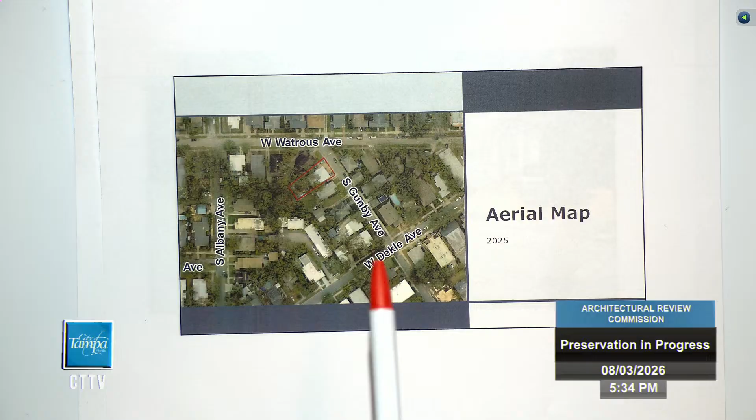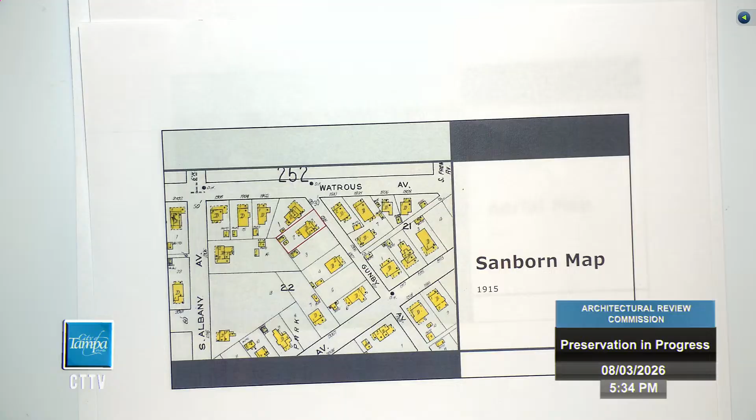So just to give you a sense of place, it's one parcel in from the corner of Watrous. It's on Cunby. There is an alley that runs behind it. Here shows the property in question. If you zoom in, you see that what's hatched in the front of the structure itself indicates that it was an open porch. So the open porch ran the whole distance of the front facade.

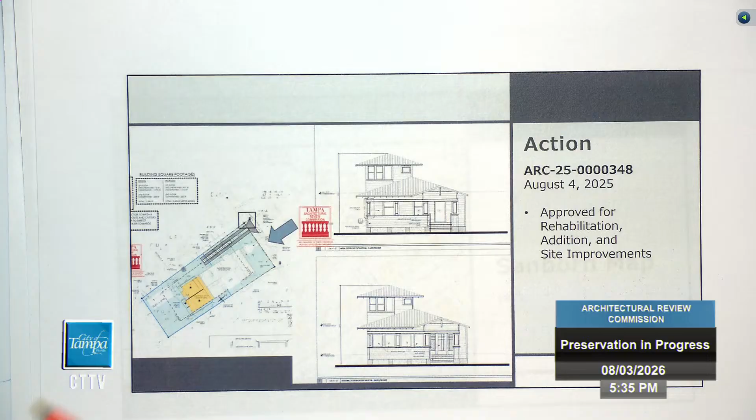These were the drawings that came forward in 2025, showing the reestablishment of a drive aisle that's more consistent with the historic fabric, opening up the front porch, and they displaced some of the square footage that they lost to the rear. So the yellow shows a one-story addition to the rear. This drawing here shows that the porch was enclosed, and now you see the knee wall that's here on the porch. A lot of times when they enclose the porch, the fenestration stays behind it. So these windows were there, we know where the openings were, and that was part of the renovation.

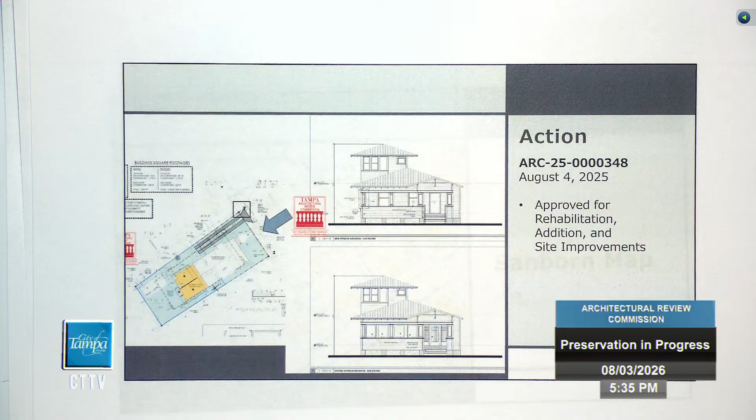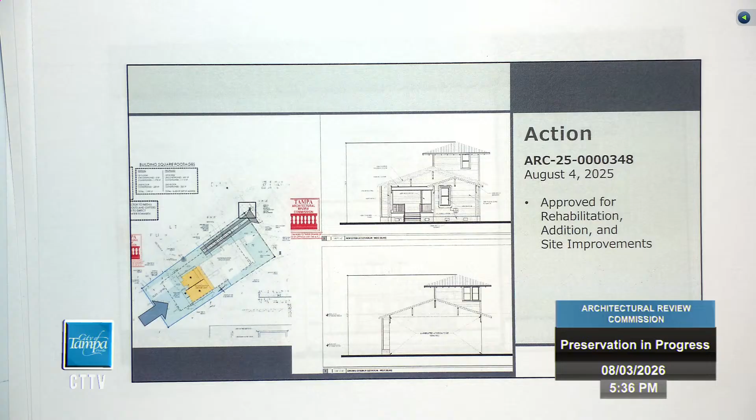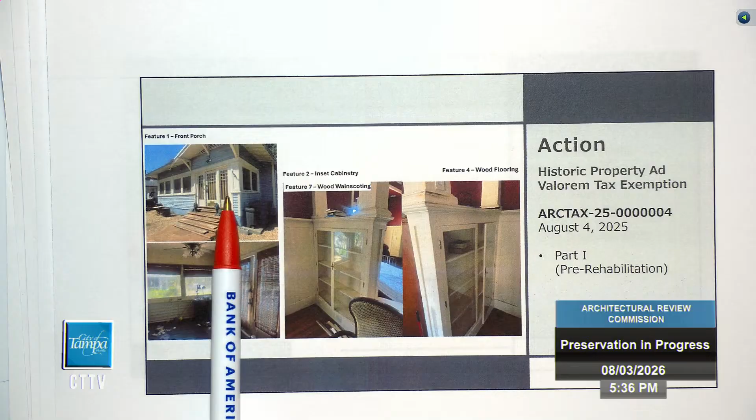Just going back to the front porch, you see how the porch was enclosed and everything was brought to the front facade. And you saw through the drawings that the doors were recessed back to where they're originally set at, and the windows were removed. As I stated, some of the interior features, they have these built-ins here with the columns that will be retained. They have the original single-hung windows that they will evaluate and see if they could be incorporated into the project. If not, they will have period-appropriate windows.

Good evening, Dana Crosby Collier, Legal Office. Wondering if anyone has a conflict of interest with any item on the agenda this evening? I do not. No? Has any member had any ex parte communication regarding any item on the agenda this evening? I have not. Thank you. So at this time, we'll do the swearing. Everybody that wishes to testify, please stand up and raise your right hand. Do you solemnly swear or affirm that the testimony being provided today is the truth, the whole truth, and nothing but the truth? I do. Yes.

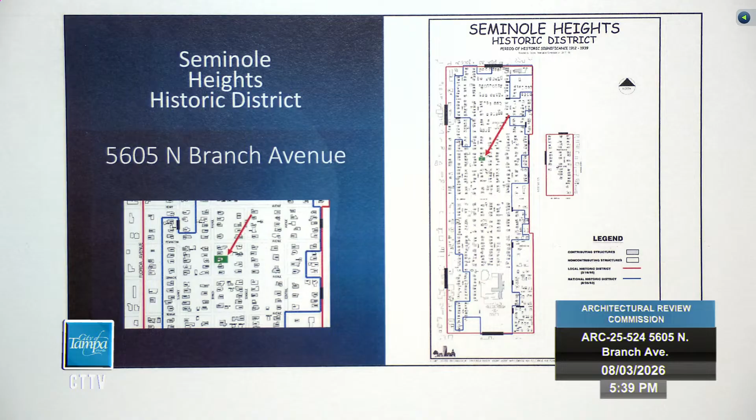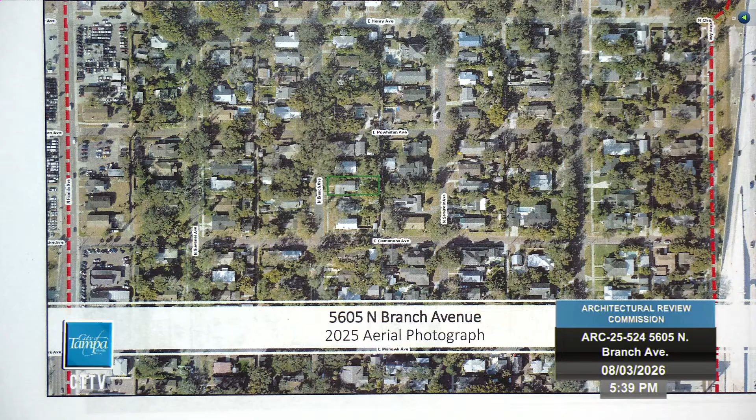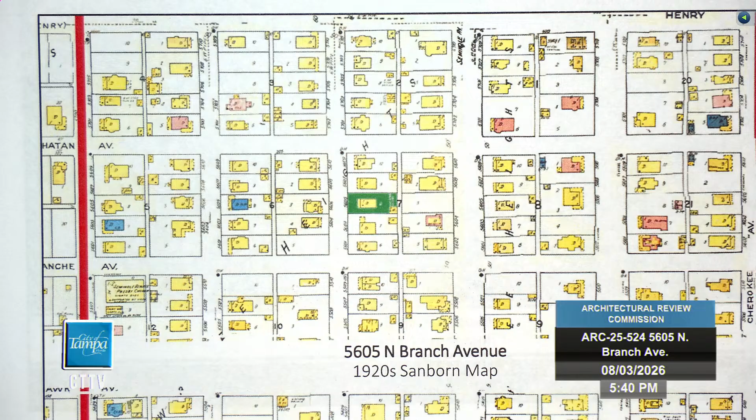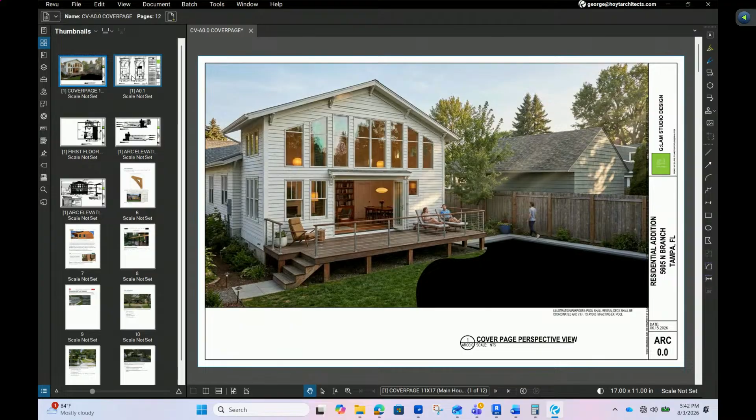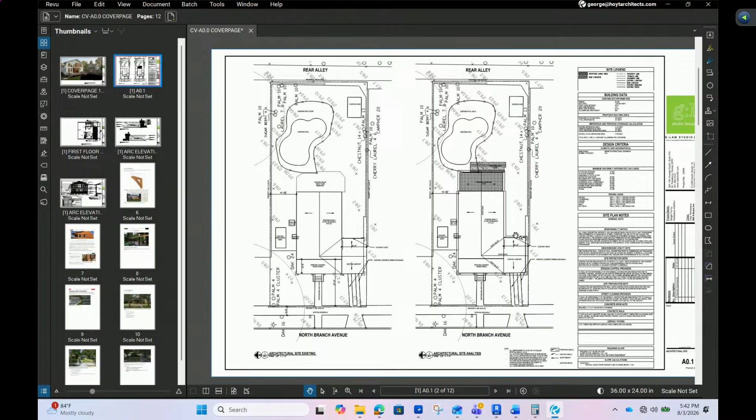The site plan showed basically on the left side the existing condition, which has an existing deck. The design intent is really to just build over that, remove the existing deck and promote the new addition on that same area. Ran all the calculations just to make sure we didn't have any impacts on the impervious or pervious ratios. So on the right side is the new addition with an extended proposed deck, which is complementary to the structure.

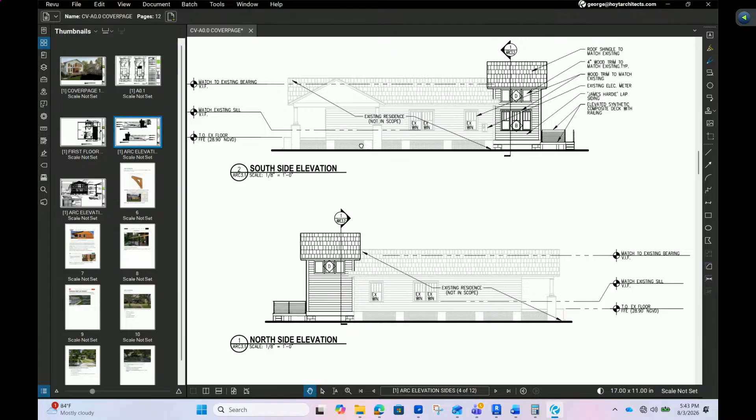Going to skip over to just the elevations so you can see the side elevations to the house. I do apologize for the grammar there. So this is looking from the carport onto the side of the residence, the existing residence. So you can see that the intent was to try to complement the existing main residence, but also introduce a little bit more distinct character with the windows and also the trim along the new addition of the structure.

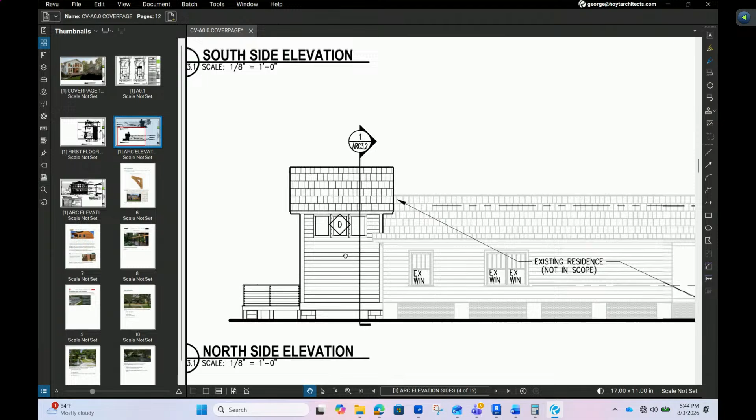Plan is to keep the same kind of materiality with the roof shingles and lap siding, and then do stucco piers around the existing structure, and then promote the exterior deck on the rear. On the other side, on the north side of the building, actually, you can see again it's just showing the mirror of the three windows at the top of the new addition. There are no new windows here, as there's a proposed bathroom in this area, and the rest of it is just complementary to the existing structure.

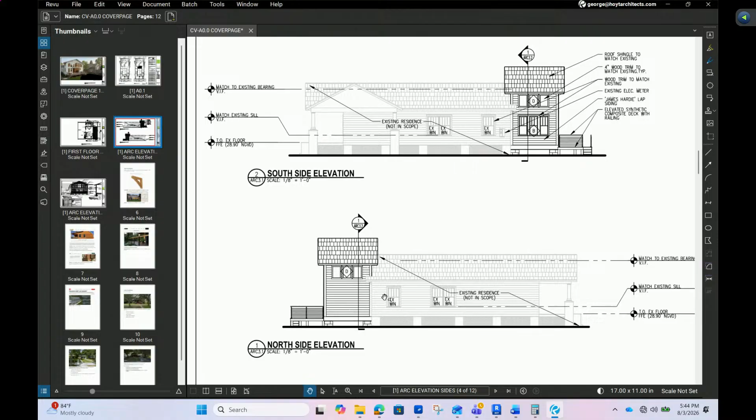And then the brackets, which will be the same brackets as on the main existing residence. We're still doing the exposed rafter tails, same kind of pier systems. The lap siding, we can promote a different, I guess from a 4-inch to 6-inch profile kind of look, just to distinguish the new and the old. And then the trim bands, which is a distinct characteristic of the new versus the existing house, which does not have any.

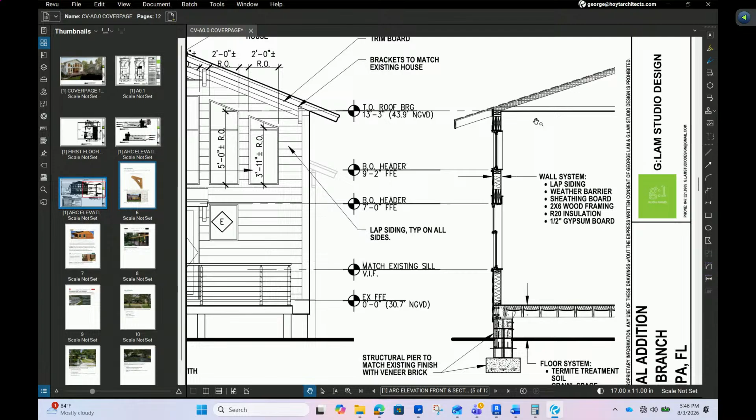On the side here's just a cross-section of what this would look like. The intention is to recess the windows in, similar to the main residence, also to use a wood-appropriate window type, and it will sit on top of these piers. They will be stuccoed, and then the raised platform. And it is a 1.5-story volume space, so I know it's a little bit of a different character from the rest of the neighborhood, but wanted just to show and indicate that.

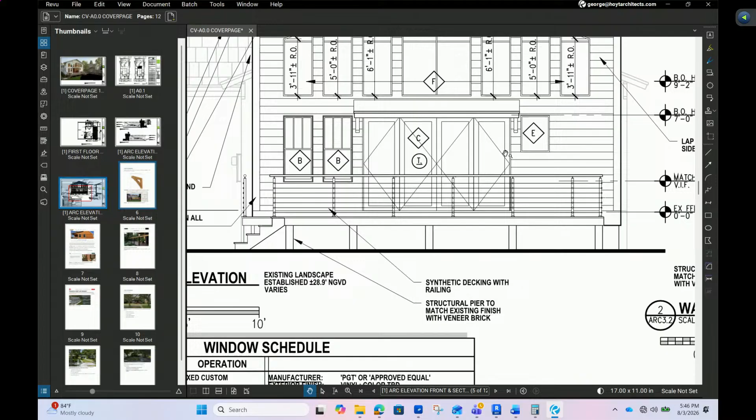And then we're also promoting these, I guess you could say it's almost similar to a NanaWall or Nana doors, bifolding doors that would open similar to this, kind of that look and feel to get that openness to the outside.

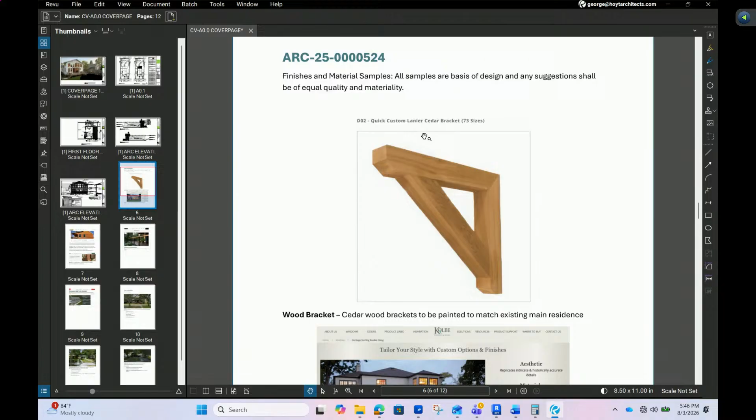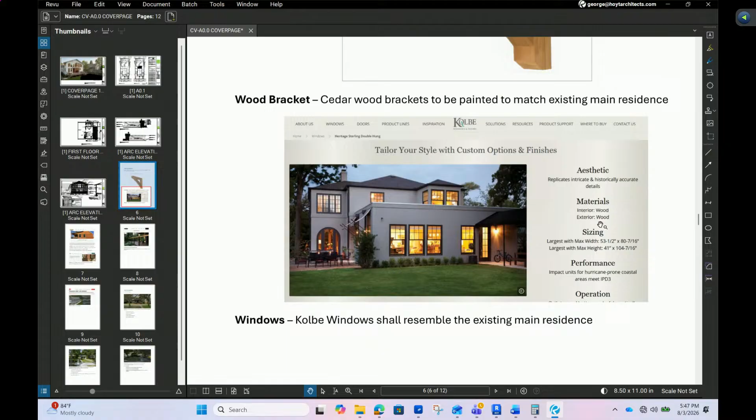Next here are just a few of the materialities. Like I said, we're reintroducing similar materials for the finishes on the brackets. These would be painted. I just wanted to indicate that they would be wood to be similar to the existing residence. The windows, we're promoting to use a wood window. I know it's a little bit of a challenge with the new aesthetic windows, but we feel like this particular manufacturer can provide some of these capabilities with the window types. And they've come a long way now with code, so impact rated is now an option as well.

The lap siding is going to be very similar to what's on the existing house. This will be painted, but I wanted to indicate that it would be wood, not a synthetic or cementitious application, just to complement and preserve the historic guidelines. The deck, what we're trying to promote is something similar to a wood look. It's horizontal, not vertical, so you wouldn't see much of it. But we would like to explore the option of a Trex deck that has the grain and look and feel of a wood material finish.

And then the railings and the guardrail, again, similar to the context, we're trying to promote something that has a little bit more longevity than just standard wood, gives a little bit more of a contemporary, modern take to the rear facade, and it's just trying to capture a moment of time between the old and the new of the structure.

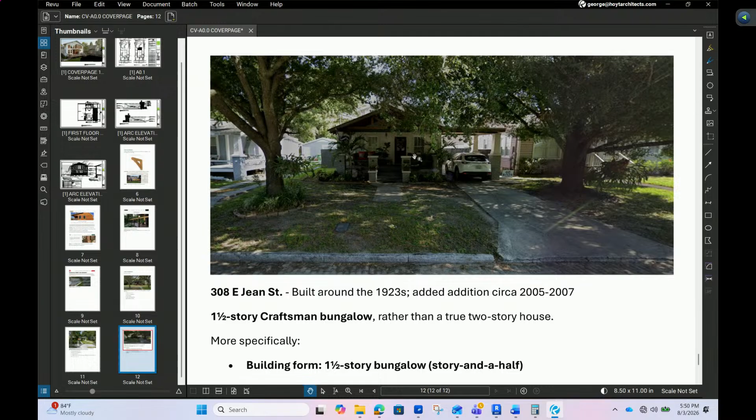Good evening, Ron Vila, staff with Historic Preservation. Staff's finding is that this project is consistent with the Seminole Heights Design Guidelines and the Secretary of Interior Standards for Rehabilitation. In reviewing this project, it had some items that were controversial at the time. We worked together to assist him to bring it more into compliance, so that we feel it is consistent.

When you look at the Secretary of Interior Standards, there are some bullet items that when you do an addition, it should be on a secondary or non-character defining elevation, that the addition results in the least possible loss of historic fabric, and that there's a distinction between the old and the new. So as you go down the side, I think that it plays well together, and then when it goes to the rear, there are some discussion points that I'm sure are going to be elaborated on this evening.

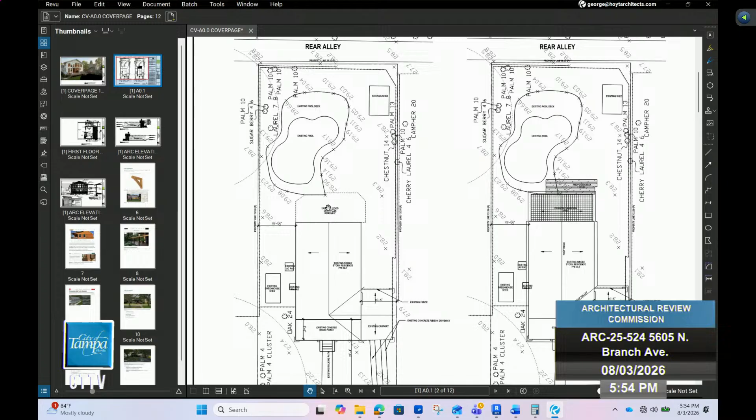Can you go to your site plan, please? If you'll zoom in to your proposed site plan over where your mechanicals are, is there a fence to the front of that area? Is that a privacy fence that's shown right there? Yes. Okay, all right. Can you show me the rear elevation?

So your trim on your windows that you have proposed here is different than what you have proposed on the side. Is that correct? Yes. Is there a reason that we can't have them all the same on the addition? No objection to adding those. Okay, and staff has suggested maybe doing a 1/1 on all the windows on the addition. Are you opposed to that either?

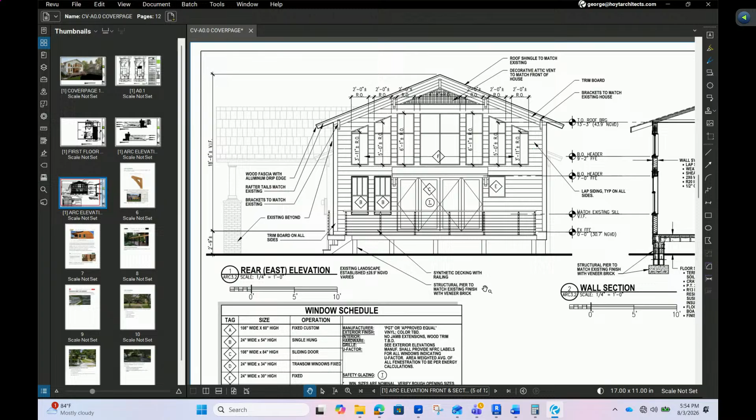Nope. Okay, all right. The roofing material on your shed roof that's over your NanaWall there, do we have material that's going to be there? It would be the same. It would be shingles? The shingles. Okay, yeah, so we just need to call that out, okay?

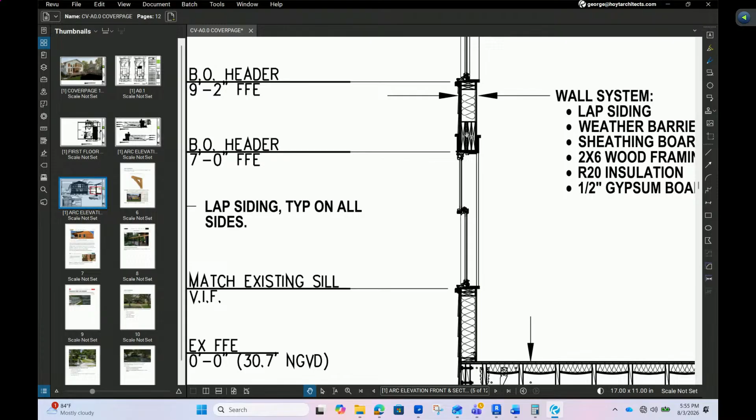On your wall detail, it appears that your windows are flush to the exterior. Is that the way it's shown? No, it should be corrected. It will sit, so it'd be basically recessed in. Okay, so that wall section needs to be corrected? Yeah, it should match more like the upper, which is more recessed in, yeah. Okay, all right.

Your material palette, you're showing rough sawn cedar pre-finished siding, and you're saying that you're gonna have it painted, and you were just trying to represent that it was wood. What type of wood is it gonna be, smooth sanded? Is it gonna be a pine? It would be preferred to go to a pine, because the existing house is on pine. It would be sanded, treated, and then painted. Okay.

All right. Your deck, you're saying you wanna use a Trex style deck. Are you opposed to going with wood on that rear area? I would have to ask the client. Client? Okay. But you'd be open to discussing it? I mean, I would prefer the synthetic material, but if I cannot do it, then I guess I can't.

Okay. Can you go back to your front elevation? I'm sorry. Go back to the front elevation so I can see. No, that's the rear. I don't have a front one here. So we don't know what the addition's gonna look like from the front of the house. Is that correct? Yeah, I don't have one, sorry. Okay.

And then staff has made a note that it appears on your image that you have here that your exposed rafters aren't exposed since you have a fascia. Is it your intent to have exposed rafters with no fascia? Yes, that would be the intent. So then there won't be a gutter? No, there won't be a gutter there. Okay. And last, well, maybe not last,

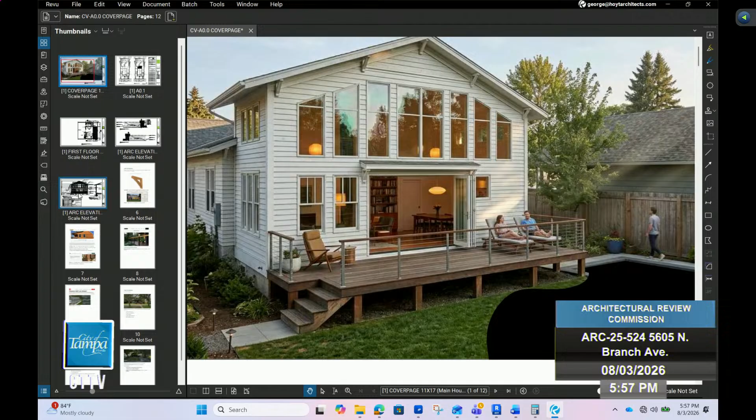So are you gonna have columns or is it gonna be a solid stem wall? No, it would be columns. Okay, so what's gonna be between the columns? Is there gonna be anything between the columns? No, like the current house doesn't have anything, so it's all open. Okay. All right. Okay, thank you.

This is last. Hardware and lighting on the exterior. Do you have any lighting on the back of the house, on the exterior? Any hardware, door hardware, anything like that? Door hardware, no. That's gonna be part of the NanaWall, I assume? Yeah, and it would just be whatever the manufacturer provides, yeah. Do you have any lighting on the back of the house?

It would be under the soffit here, under the little awning. So it'd just be some lights. Recessed lighting? Yeah. Okay. I can't think of anything else right now. Commissioner Brogan?

You don't need, code-wise, the railing on the edge of the deck, correct? I'm sorry, for code? Yeah. I believe I do just because of the height. What's the height above grade? This is about 2 feet. Okay, you don't need it at 2 feet. The code is 30 inches. 30 inches, okay. Yeah.

Are you married to the aircraft cable and steel and modern railing? And I'm not opposed to it, I'm just asking you, are you married to it? It would be rods, they wouldn't be air cables. That would be the design intent, yeah. But I guess I would ask the client if he's opposed or not. Okay. I'm okay with no railing. Okay, no railing at all. Okay. Yeah.

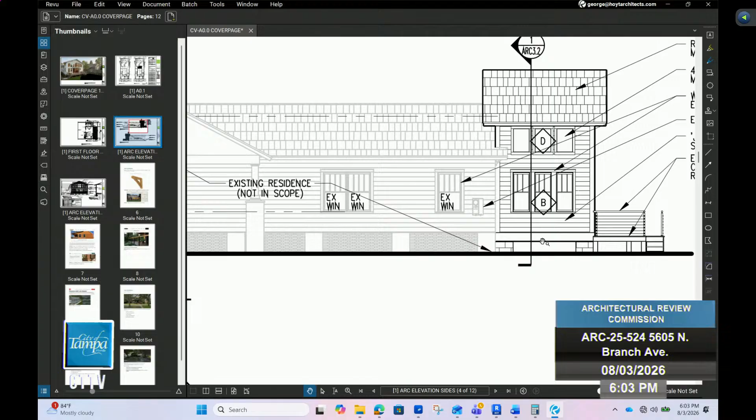Okay. So there is a lattice screen in between. So is there a reason you're not going to do a lattice screen? You're not proposing to do one on this addition? No, at first it was just assumed to not put anything in there, but I don't mind putting in a lattice to complement the rest of the house. It was partly because this was treated as a new addition, so it's just to give a little bit different character, that's all. And because we had this deck that's open as well. Yeah.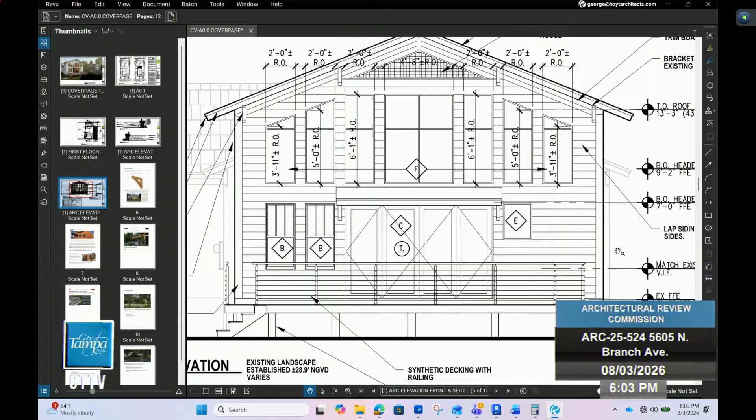So go back to that rear elevation again. I think you're showing it, but there's a couple of things that don't match up with the rendering. So the walls on the north and the south are set in from the walls of the existing residence. Is that correct? Yes. In the back, the faint line is the existing and the proposed is the darker bold line showing the offset on both sides. Okay. Yeah, there's a lot going on in that back elevation. It's throwing me off a little bit.

Okay, so I have a question for Ron. Ron, the synthetic material on the deck has come up before. In the back, the board has reviewed and approved certain situations, but as a replacement for wood, there's ipe out there that weathers very well, and there's KDAT, kiln dried after treatment. Both of those have been successful in the field, so if you want to stay with a natural material, there are options out there. Okay, thank you.

For the applicant or the owner, would you be open to either one of those options as opposed to the synthetic material? So is it wood and just treated differently? Ipe is a wood, it's just a very dense wood. And the other one's wood too, it's just kiln dried, so it's dense and it just doesn't rot as easily. Oh, okay.

This question comes up quite often. On front porches, there is no flexibility. It has to be wood on the historic homes. So we have these products that we've witnessed over time, 5-10 years, that if you take care of them, treat them, do maintenance to them, they will have some longevity, so I just wanted to throw that out there.

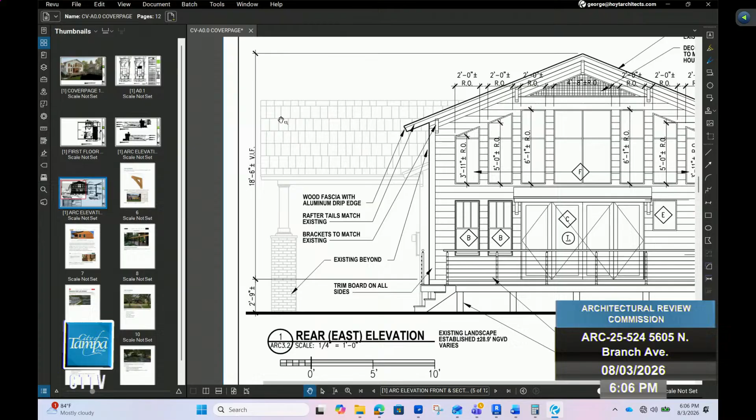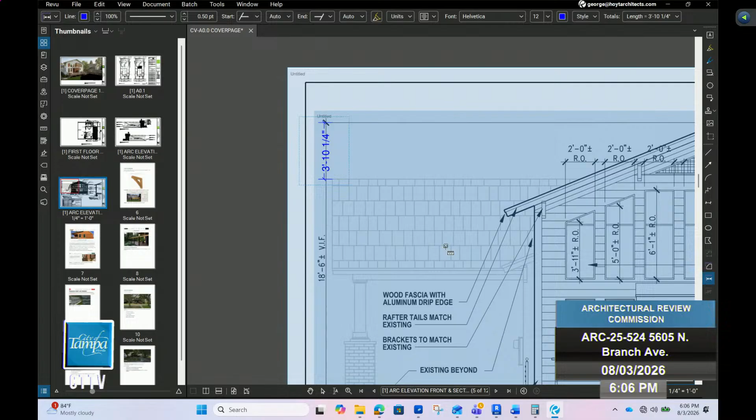So the peak of the existing, let's see, so the proposed is what, 18.6? It's gonna be 18.6 is the proposed. Okay, and let me see, I can do a quick... It's almost 4 feet of a difference. Okay. Okay, those are the questions I have. Does anybody else have any other questions? Okay. All right, you have 5 minutes for rebuttal if you so choose. Nope, not this time.

Okay. All right, at this point, we're going to close the public portion of the hearing and we will move on to discussions. The floor is open. I think he needs to do some more homework. His plans aren't mentioned, his elevations, he doesn't have some materials called out. I would have no problem him working with staff on finalizing the small details, but I don't feel comfortable right now that he has conflicts inside of his drawings. If we approved them, what are we approving? The elevations or the plans? The material call out or the plan call out? It just seems to be conflicting each other.

I understand the conceptual nature of what he's presented to us, you know. Yes, is he missing a few things that are required? Yeah. I don't have a problem with the design. I don't have a problem with the design of the windows. I think it's a rear-facing rear addition that is, you know, not as onerous as it looks, like you're saying, confusing with the big glass and all that.

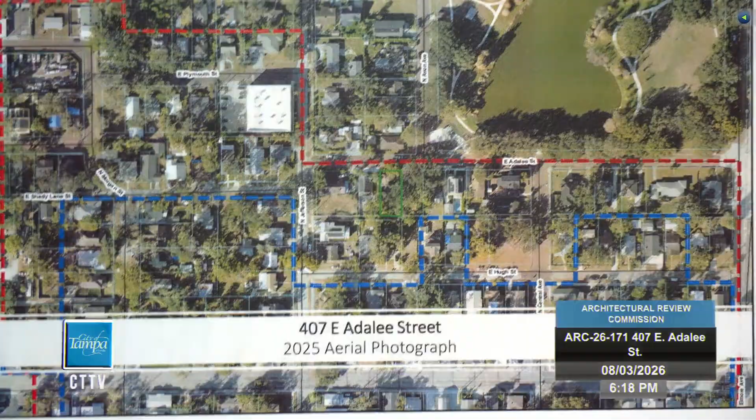This is looking from above. See the property here? It's by the lake that's in Tampa Heights. This is looking at the vacant parcel. You saw this a couple months ago. The tree in question in there is no longer a question.

They worked it out. They hired a professional arborist in communication with the city's arborist. The tree is no longer an issue. The tree is going to be removed, so it's not in the way of the structure. This is looking at the fabric around. This is new construction. That's on Adalee as well.

This is a period structure on Adalee that abuts the property to the west. Directly across the street, you have a non-contributing structure. Some street shots. This is a brick-lined street. Have the interstate in the background over there, and then once again you have the little lake that's in Tampa Heights. Moving in the other direction, the historic bricks with the granite curbing.

And just to conclude with the alley, it is an open alley. It has not been vacated, but it's unimproved. They're choosing to do all their vehicular access off the primary street. I will have the agent address the board.

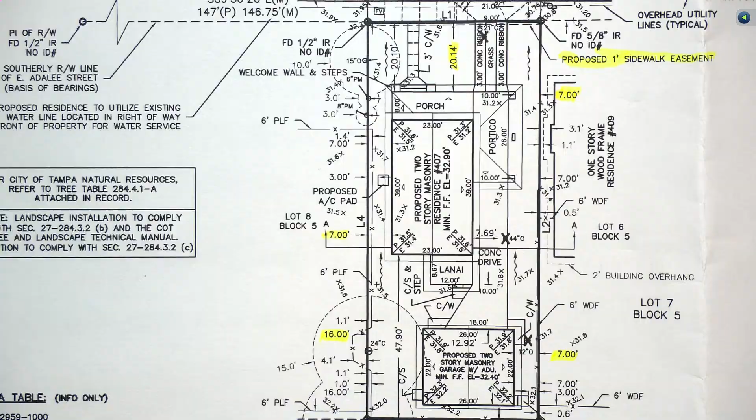So this lot is approximately 49 by 115. We're applying for a new construction, single-family residential home with approximately 1,750 square feet in it, along with an ADU in the back under the Tampa Heights guidelines for ADUs.

The front setback aligns with the two contributing structures to the left and the right with a 20-foot front setback, and the granite curb is to remain. It is to be lowered at the driveway, and we will be deeding over a 1-foot sidewalk easement as transportation desires a 6-foot sidewalk. There's only 5 feet between the granite curb and the property line. The sidewalk will abut the granite curb and extend 1 foot into the sidewalk easement.

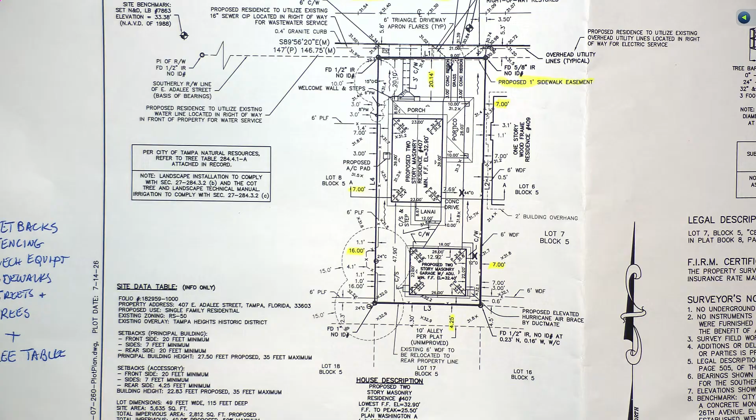The side setback at the porte cochere to the east is 7 feet. The main house side setback is 17 feet on the western side, and the ADU is a 7-foot side setback on the easterly side. There are 4.25 feet at the rear, abutting the alley, and 16 feet of side setback on the westerly side. The granite curb is to remain restored and in place, and I'm sorry, and then you've got mechanical equipment on the westerly side.

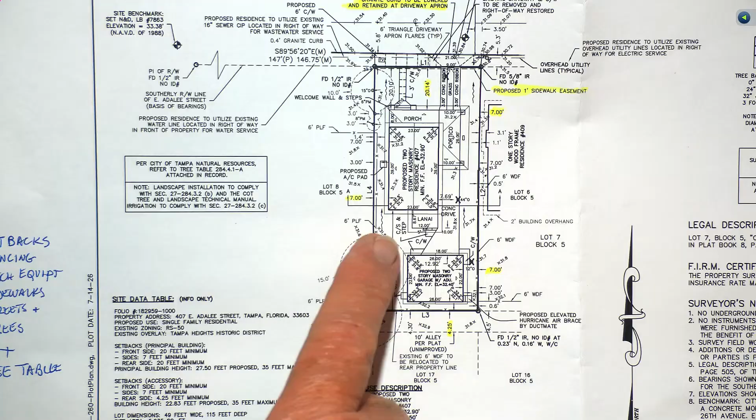There is some existing wood fence that belongs to the easterly neighbor that runs along the easterly side, and there is a 6-foot white vinyl fence on the westerly side that belongs to the neighbor to the west. Neither one of those vinyl fences extends past the front porch of the proposed structure.

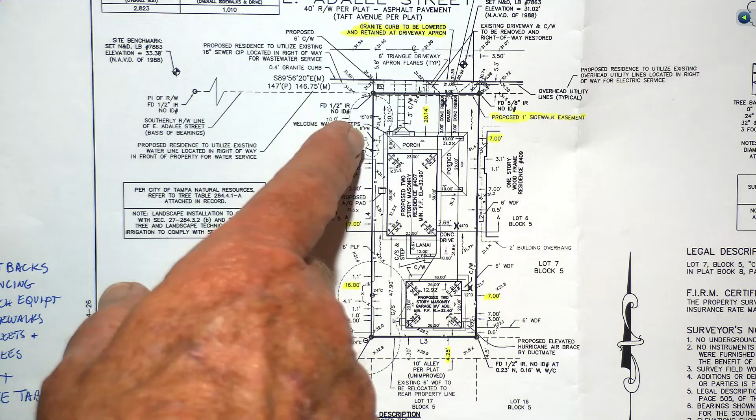The sidewalks per the guidelines for Tampa Heights are scored at every 3 feet, along with the lead walk entering up towards the welcome walls, flaring at the welcome walls up onto the front porch of the house. There is one tree to remain. There is a 10-inch live oak at the front property corner that is a shared tree, along with 2 cocos plumosa palms along the westerly edge, and as Ron mentioned, the oak at the rear of the porte cochere has now been granted a variance for removal.

There is a 12-inch oak in the westerly corner between the garage apartment and the property line, and we have created a tree matrix mitigating those trees, and I have a copy of the tree matrix which has been entered into the Accela record. That was formulated with myself and Natural Resources, City of Tampa.

This is a photographic copy, basically, of what the house will look like. This is an actual model that's been built previously in Tampa Heights.

And I will begin with the elevations. I'm going to present a rendering just for your benefit, prior to. Does that show up there? Let's see, there we go. Oops, sorry. That is actually just a rendering, and then I will present the elevation that it actually comes from. And this is the front elevation facing north.

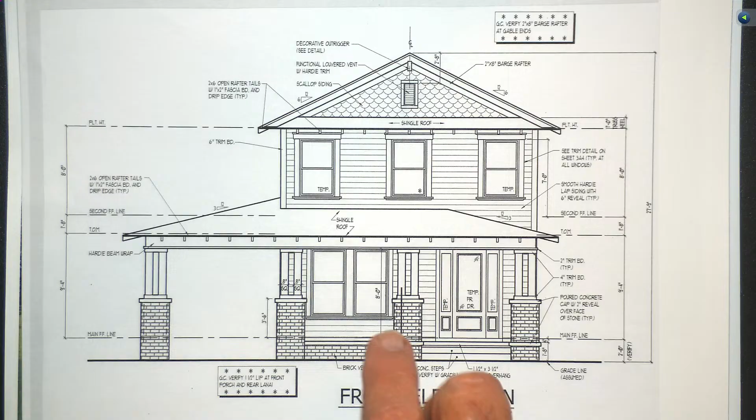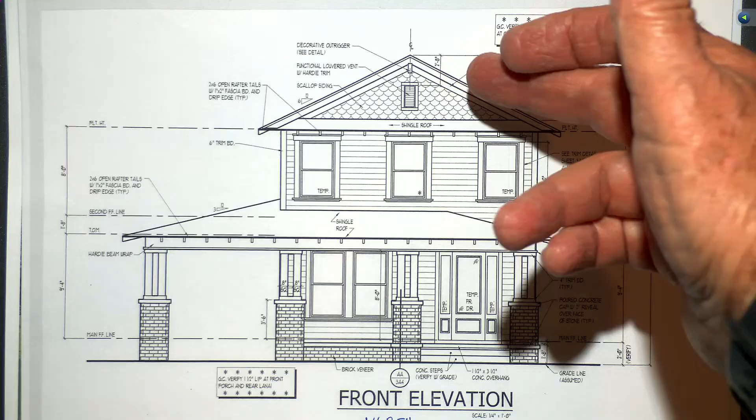Get it all in there for you. So, very typical design, open rafter tails, windows that are essentially marked in some sort of repeating pattern. It has a period correct front door with 2 side lights, along with a smooth finish 6-inch Hardie lap siding throughout both the upper floor and lower floor, upstairs and downstairs, along with a fish scale in the peak.

In this particular one, there is a functional louver at the top that was originally listed as a synthetic product. In our discussion with historic preservation, that will be converted to wood. The style will be the same. I apologize, we didn't have time to change it prior to this meeting.

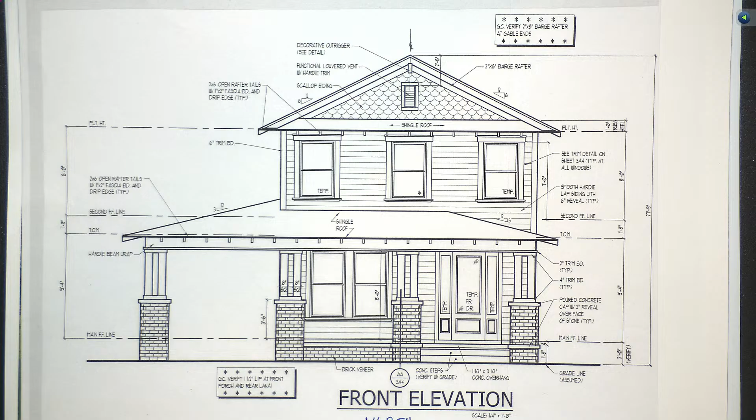Here is a rendering of the rear elevation, or the elevation to the south. It will have a petite porch on the back. This is approximately 8 feet by 8 feet, and it will continue on with the same elements, with the exception of the columns will be petite, and I will show you a column detail a little later on in the presentation.

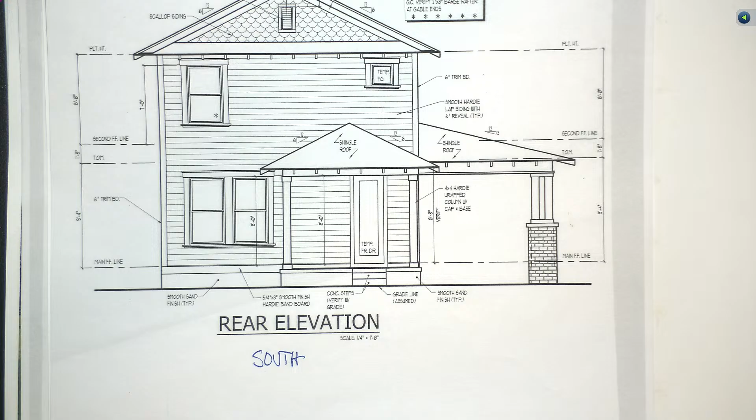Here is a picture of the easterly elevation. And, yes, sorry. And the left or easterly elevation, thematically carrying the same materials on all 4 sides of the house.

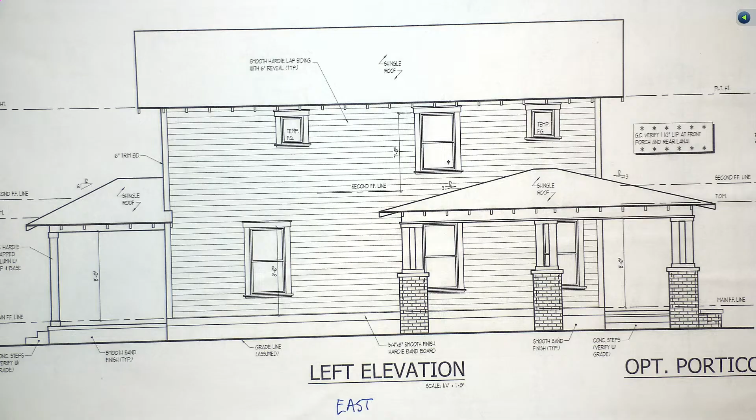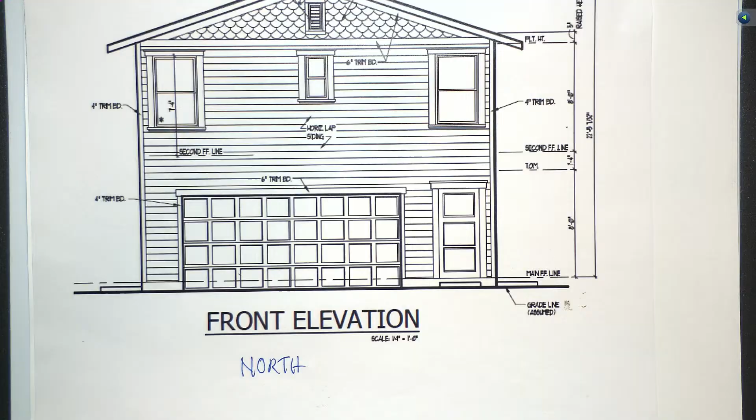We'll now take you to the accessory dwelling unit. During this preparation, we did have discussion with historic preservation, and they have encouraged us to, this is the northern or the front elevation of the ADU. There is a copy drawing of the elevation, the front northerly elevation with a two-car double overhead garage door.

In discussions with historic preservation, they have asked us to create a pair of single garages, essentially the same, but changing it to a pair of single overhead garage doors. So the only change was going from a single double car overhead garage door to a pair of singles.

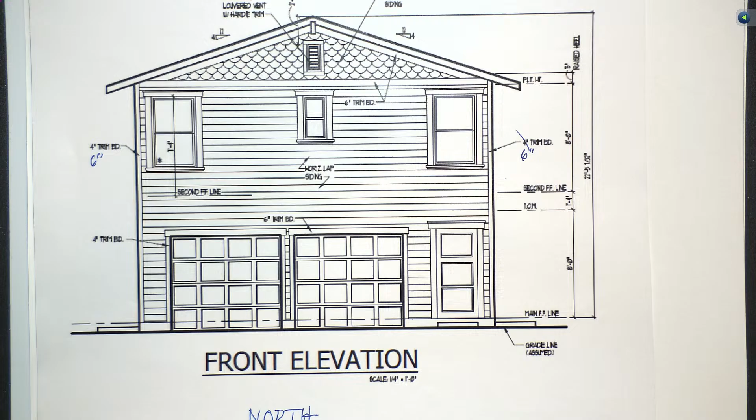Here is a copy of the north or front elevation of the accessory dwelling unit, along with the drawing, once again carrying the same materials from the house to the ADU. There is one change that came in late. It is reported in the HP staff report. Inadvertently, this has 4-inch corner trim on it, and it will be changed to 6-inch corner trim to match the house.

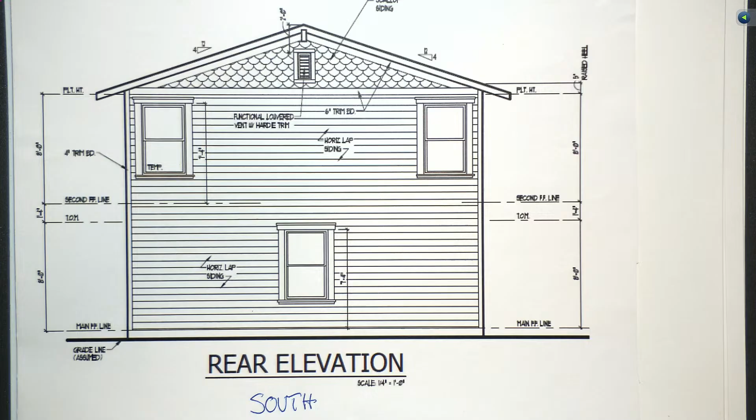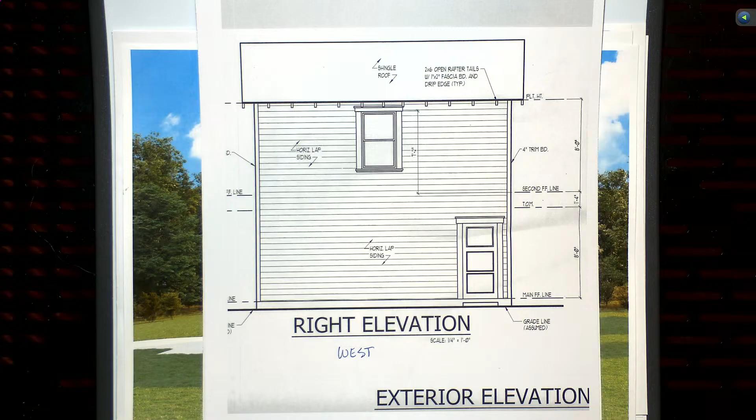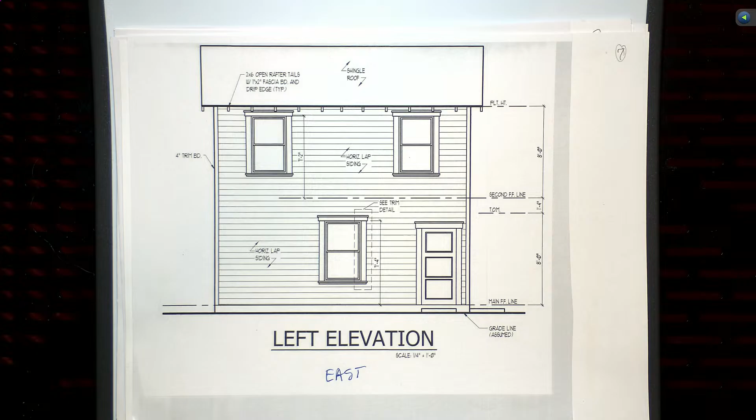Additionally, here is the western elevation, or the right-hand side of the ADU. And I'll turn that, let's see if you can get that in there. There we go. That's the westerly view. And finally, the left-hand side, or the easterly elevation of the ADU, with all the same materials. That's the 4 sides of the ADU.

Additionally, here is the front porch wall section. This home is 2-story all block, and the windows will be recessed in a masonry type opening. We've got a PGT hurricane impact window, PGT Series 5500 impact, and they will be recessed 4 inches back into the masonry openings, both upstairs and downstairs.

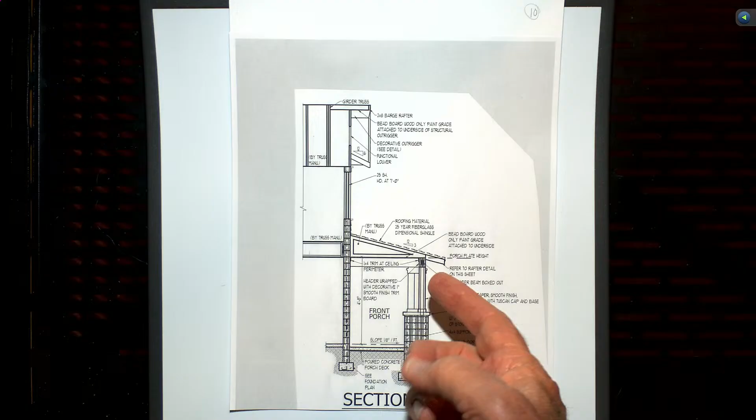Along with that, it will have the standard trim, and I have a trim detail that I'll articulate to you guys. Pretty straightforward. One thing to note, there is a 2-foot by 2-foot welcome walls on both sides of the entryway. You probably noticed it in the artwork when I started. The windows recessed, beadboard at the interior ceiling.

3 and 12 pitch on the front porch roof. That's to give more elevation to the front side of the house. Main roof is 6 and 12. The garage apartment is at 4 and 12 and does meet height code of less than 22 feet 6 inches for the Tampa Heights overlay for ADUs.

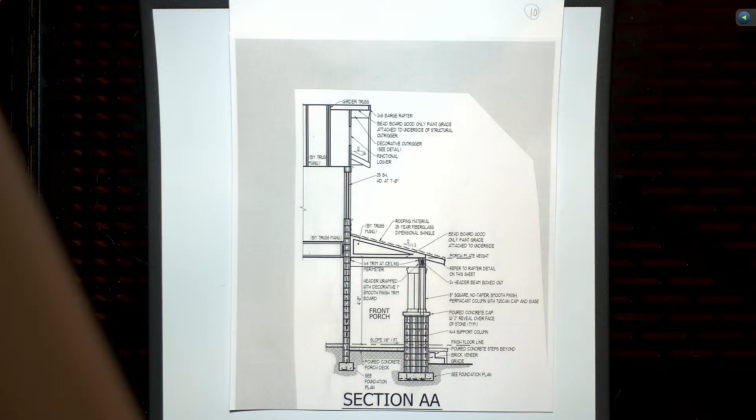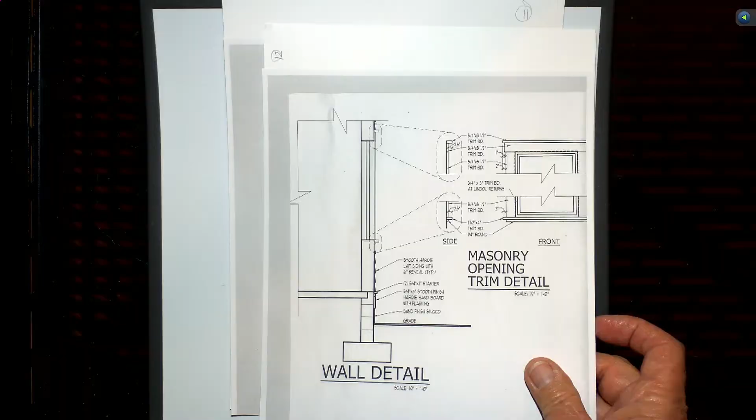Here is a copy of the rear wall section at the rear porch, along with the wall detail revealing the windows in both the ADU and all 4 sides of the house, upstairs and downstairs.

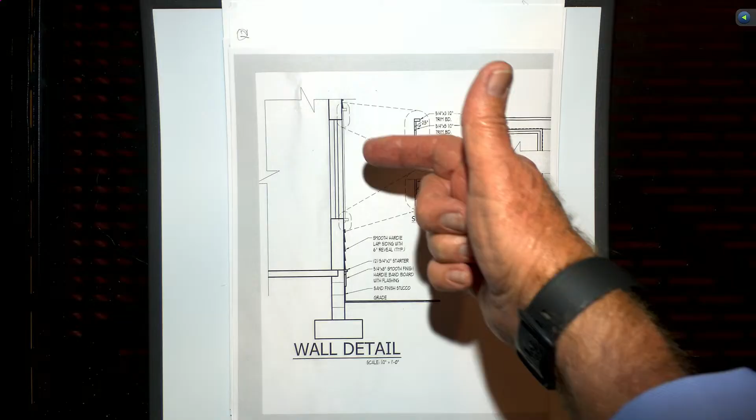You have a midline installed into the masonry opening, and if you go over to the right, you have the proper headboard at the top with the quarter round, with the 5/4 trim around all of the windows, and then a 3.5-inch deep Hardie cement board sill.

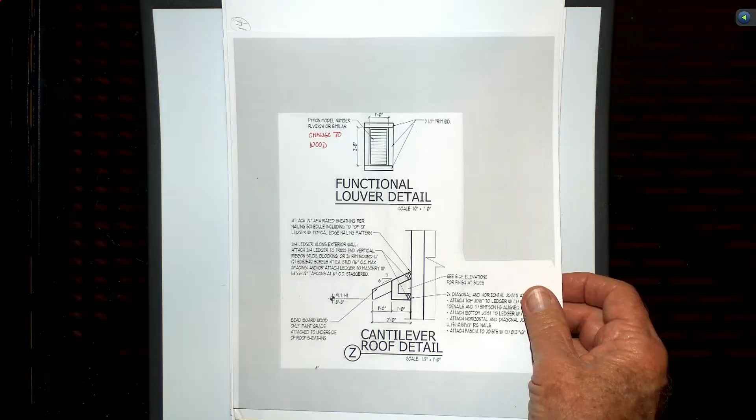Here's a copy of the functional louver detail. That one lists as Fypon. I just put a note in there, it's to be changed to wood. There is a petite small column detail at the rear patio. It's a 6x6 wrapped in 1x Hardie material with a base and a collar created out of Hardie as well.

There are outriggers in both the front of the house and at the sides of the ADU, and the outrigger is approximately 2 feet long by 10 inches tall, with a slight chamfered cut on it.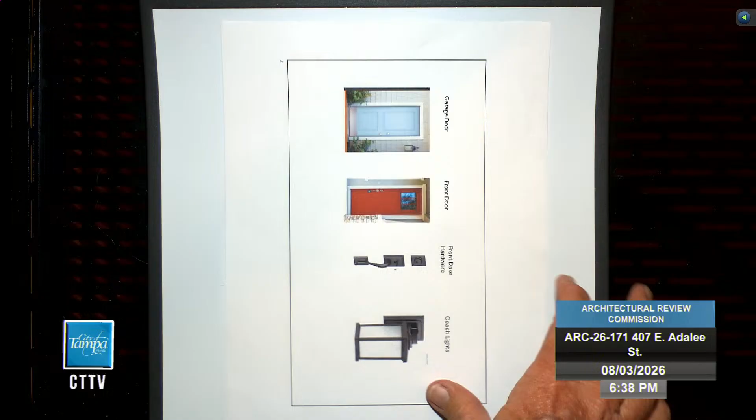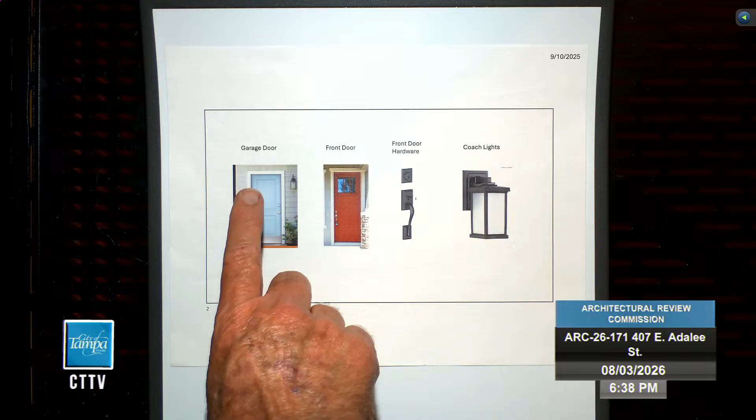We are using a 1/1 PGT Impact Series 5500 window in a masonry setting. All the exterior lighting hardware, coach lights and all, will be in a black iron, along with black iron exterior hardware, a Craftsman style front door, and then this solid door is for the exteriors of the ADU. The ADU has an enclosed staircase. That's why you see 2 doors at the bottom. So you go into an enclosed stairwell up and into the ADU.

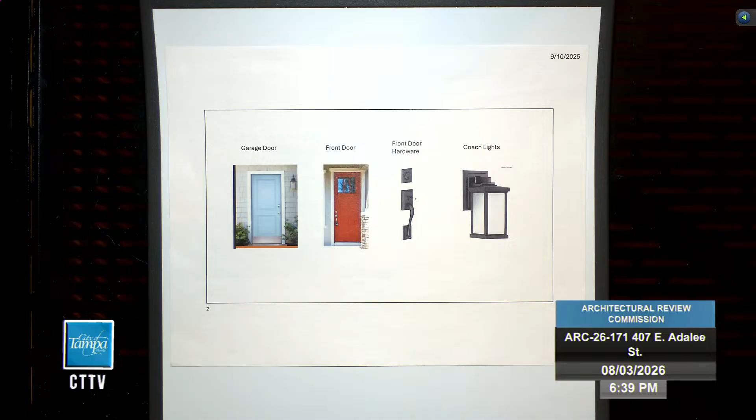Here's a better shot of the door. This is not, I apologize, this is not the door. This one has a 2/3 light door on it with the 2/3 light side lights on either side, and I apologize for that. If you'll bear with me one sec. My apologies. That's the door style with the 2/3 light in it, clear glass. That would be the style of the ADU exterior service doors, pedestrian doors.

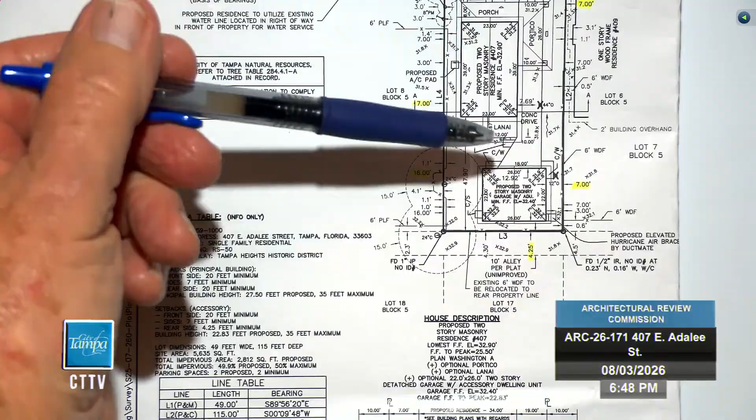Adalee here, and this essentially is the front or the north-facing part of the ADU. Oh, I got it now. This enters into the stairwell that goes from the front upwards towards the back, and this window sits on top of that stairwell. You traverse up the stairs and into the ADU. So let me stop you there. Is this door gonna look like this, or is it solid?

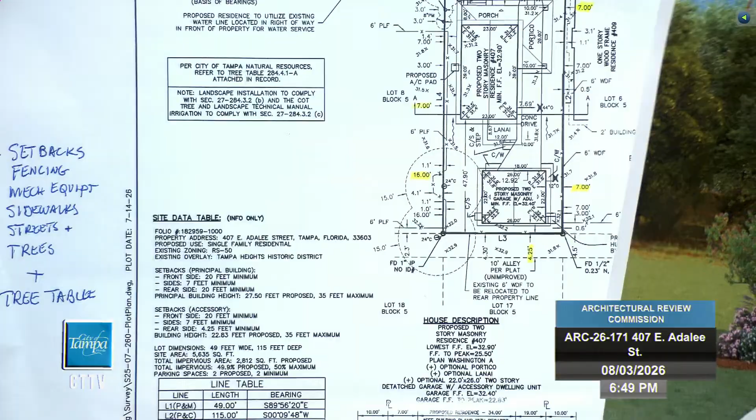It'll have a Craftsman style with a top light and a dentil mold on the front. Does that show? Yeah, kinda. Okay, so it's going to look like that. Then additionally, there is the door, so that's the front. And then there is a door out of the automobile garage here that you exit from inside where the vehicles are, a pedestrian door out into the backyard, and that will have the same door treatment as the pedestrian door going up the stairwell.

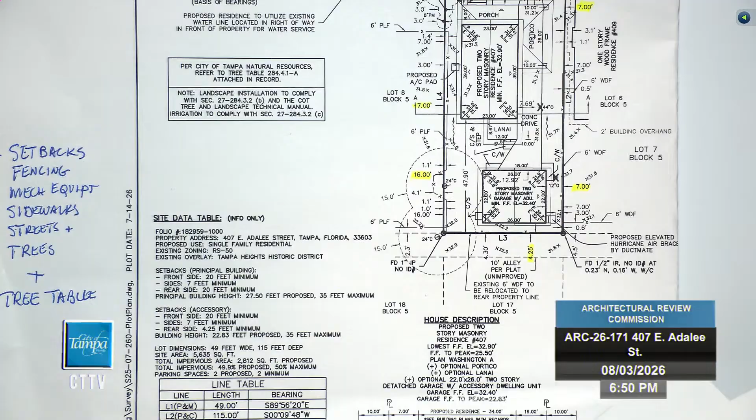Okay, and there's no sidewalk, you come out on grass like this? No, it'll have some kind of little 3x3 or lead walk or something. Okay, so that's it, two doors? Oh, one more door, yes, one sec. If you look at the site plan, there's a little sidewalk there. Oh yeah, right, okay, perfect.

And then the last door is this door, and that is storage under the stairs. So it's an exterior locked door, and I've got two of them that are Craftsman style. I'll just put the storage door as Craftsman, and they'll all match. Okay, so the front goes upstairs, one comes out of the garage, and the other one goes under the staircase for storage, for a total of 3 pedestrian doors.

But we're gonna make them all look the same? We're gonna make them all the Craftsman style with the light in. Not much use underneath the stair, but I might as well make it match. Yeah, fine, don't have a problem with that. That's all I had, thank you. You're welcome. One quick question. The thin brick, does it come with formed corners? Yes, it does. That was my only one.

The mechanicals for the ADU, where are you putting your mechanicals for the ADU? We are currently showing them back behind the man door. Yeah, let me show you here. Hand me that, Fred, I'll use yours. Sure.

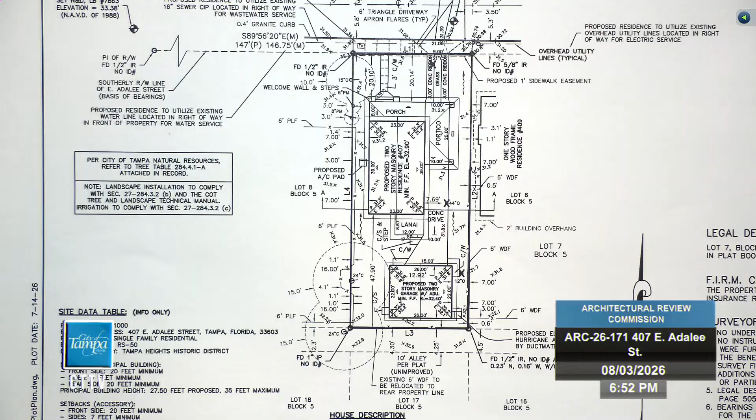Is the Hardie siding you're gonna use smooth or textured? Smooth. Smooth, thank you. Your front deck material, did you call that out somewhere? It's concrete with a lip. Okay, all right. And then my last question is for staff. In this Tampa Heights overlay, the ADU allowable square footage is 1,100. So we're over that. So they're gonna back out the stairwell because it's interior, so it'll be under the 1,100 max. Okay. That's all my questions.

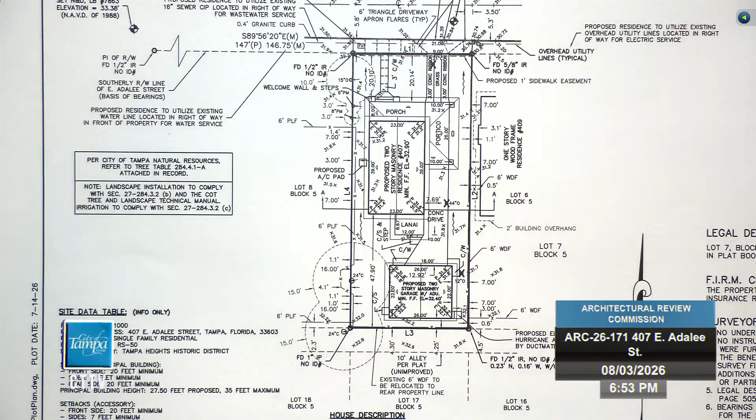While you've got the site plan up, that front walkway, is that 3 feet wide? On the pedestrian walkway to the front door? Yes, what width is it? It's 3 feet that flares to 6. Okay, and that's what you built on the previous house, the picture you showed us? I guess my question is, why 3 feet? I didn't know if that was a pervious thing as well you were trying to cut.

So it's just a walkway. The site plan shows it flaring up to 6. My preference is to flare it out; the stairs are captivated within the welcome walls, and then you take that sidewalk and bump to the edge, and you get a clean line there. It was a very thorough presentation, but could you just throw the picture up of the house that was actually built? Yes, okay.